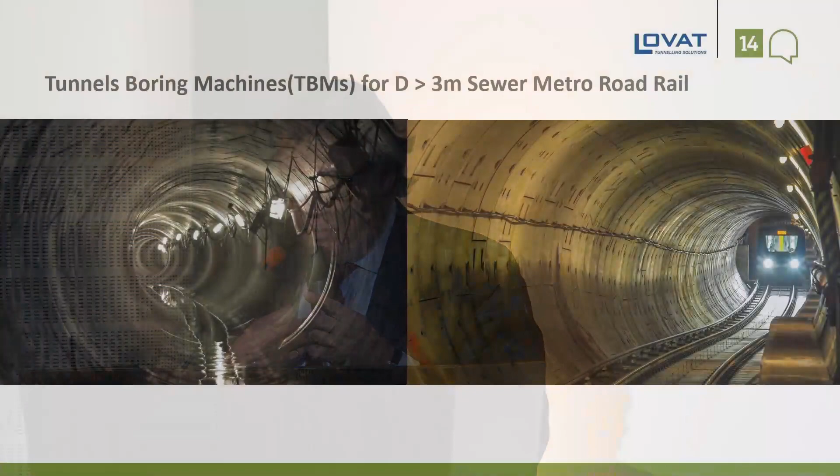So I'm here to talk to you today about my experience in urban tunneling. I am a TBM manufacturer, so I'm usually the last one on the list when it comes to contracts and initiating works. So we have a very practical way of doing things. I'm a mechanical engineer. Are there any other mechanical engineers in here? Please hold up your hand. That's what I thought, none.

So in my world, if it doesn't move, I'm in trouble. In your world, if it moves, you're in trouble. So we are very much detail-orientated people. We're always looking to innovate and create new solutions to problems. So I may be going a little deep into the weeds of technology, but that's what we mechanical engineers do, and I'm hoping to convey some vision at the same time.

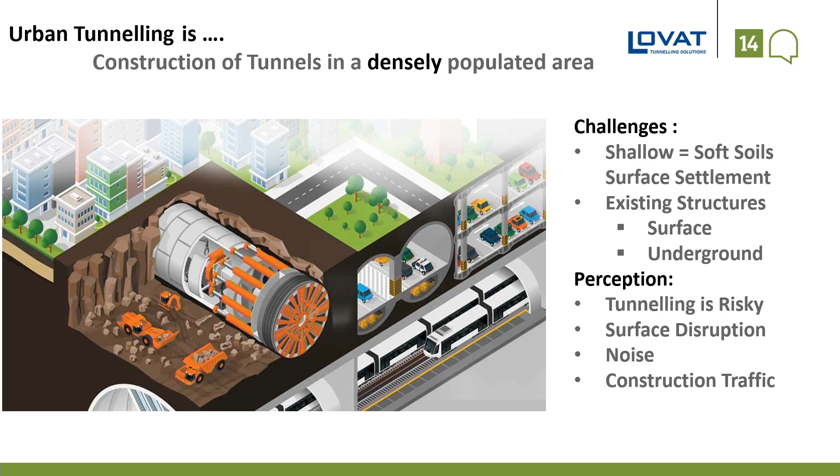So tunnel boring machines, or TBMs, are generally larger than 3 meters in diameter, used for sewer, metro, and rail tunnels. Urban tunneling is construction of tunnels in a densely populated area. The challenges it brings: the tunnels are shallow, which means they're in soils, soft ground. We have to deal with existing structures, either on the surface or underground.

And the perception is tunneling is risky. And the only reason that is a perception is because negative results sell media. We don't provide enough information of our successes around the world, but there's this perception. Perception is also disruption on the surface, noise, and traffic congestion, which is really not the case.

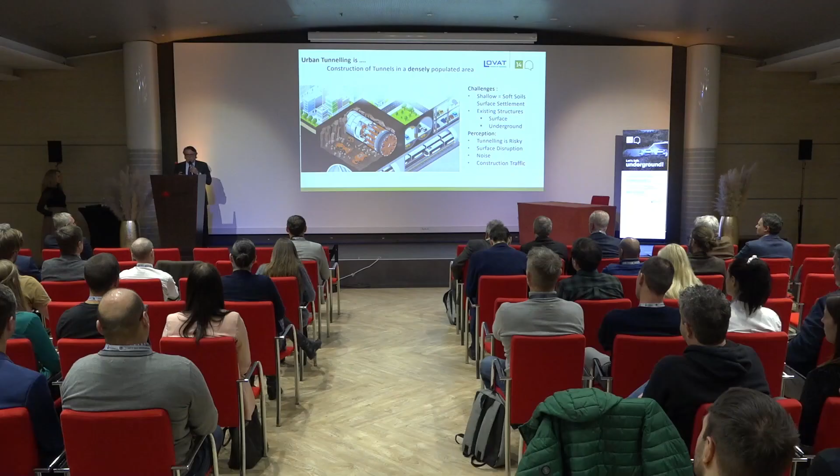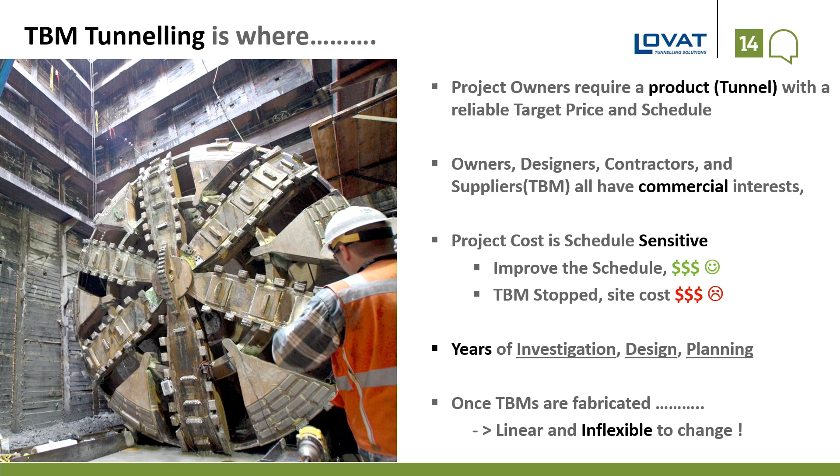Tunneling is where project owners require a product, a tunnel, with a reliable price and schedule. Owners, designers, contractors, and suppliers of TBMs all have commercial interests. We're in business to make money. End of the story. Project cost is extremely sensitive to schedule. There is a high capital investment to get the project up and running, but when there are delays in the project, the costs actually skyrocket, become disproportionate. So, if we improve the schedule, we save money.

A stopped TBM is extremely expensive, and usually we mechanical engineers feel the heat first when we have a machine that is stopped. Tunneling is years of investigation, design, and planning. Years. It's just not something that happens when you buy a TBM and put it on the ground. There's a plan. Once a TBM is fabricated, brought to site, it's relatively inflexible. So therefore, you go back to the first point: planning, planning, planning, and planning. And I will say this many times during this presentation.

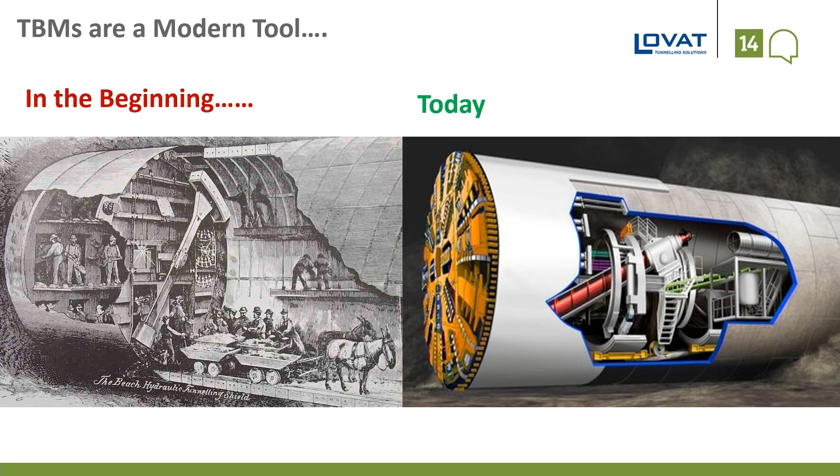In the beginning, 100 years ago, this is a project in Canada. You see the means of excavation, manual, haulage of material by a donkey, a segment erector. Today, we have a very complex mode of excavation, cutting heads, excavation material out by a conveyor, and the same in concept segment erector. In 100 years, we moved forward quite quickly on the innovation side, and predominantly this was done in the 70s, 80s, and 90s.

Since the 2000s, and it goes back to what Arnold is saying on these contractual arrangements, we have become quite stagnant in terms of our innovation on tunneling machines. One thing we have done is we've moved the size of machines further, larger and larger.

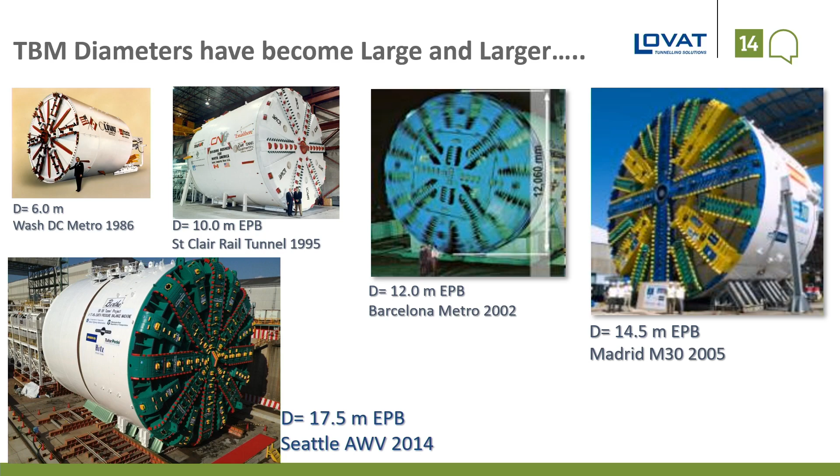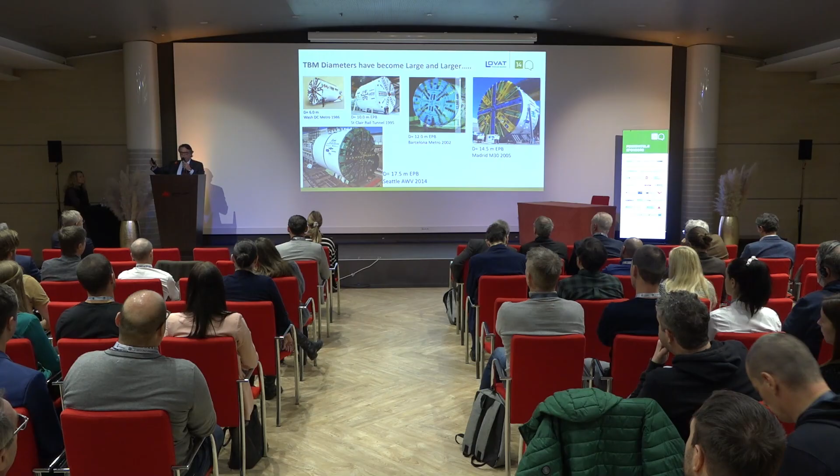When I graduated university, this was a big machine, a 6-meter machine. And then, oh my God, who's dreaming of a 10-meter machine? Who's crazy enough to dream of a 10-meter machine? Mechanical guys. So we ended up building 10-meter machines, then 12, 14, and now the standard is up to 17, 18-meter diameter machines. Today, the 10 to 13, 14-meter machines are the norm. You can have a high level of confidence in these size machines.

The development of this technology has been by quite a large group of people. We in North America are developing our own. The Japanese were leaders in the 70s and 80s of the technology, and many of the things we use today originated in Japan. The Europeans, specifically Germany, also ran their own program on developing machines, as well as the British. Today, the center of activity is coming from the Chinese. They are the ones developing, innovating, and mass-producing these machines.

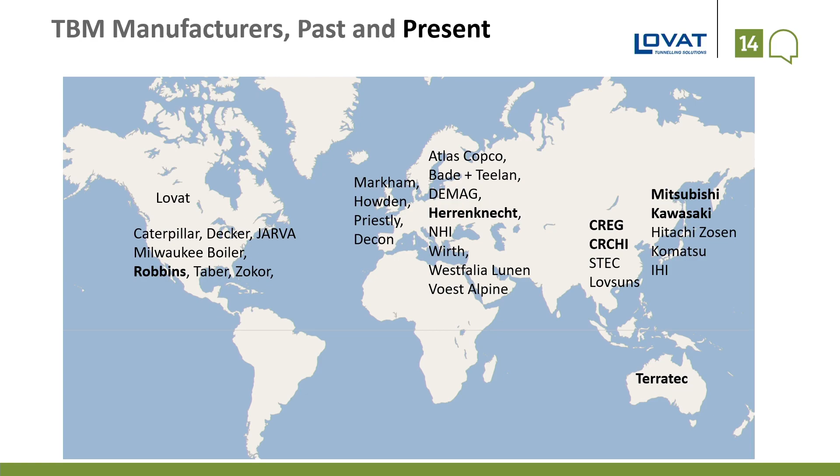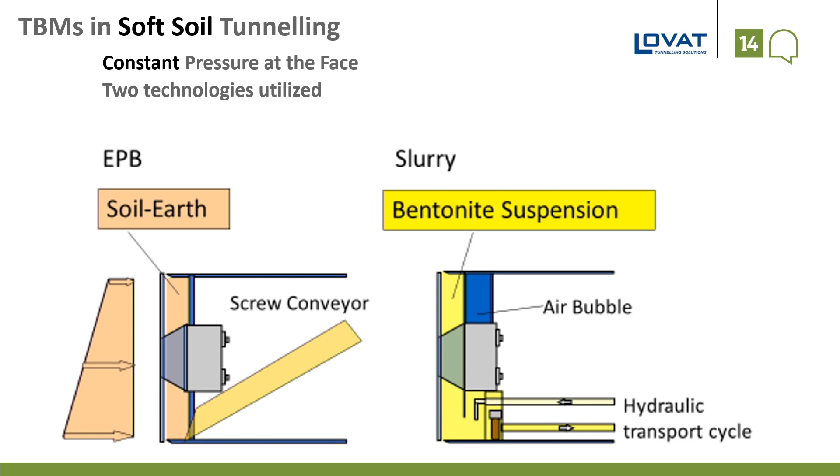So what tools do we have when we go into soft ground? We have basically two tools to choose from, and they're quite similar but different in the way they achieve the goal. The goal is constant pressure. These are submarines, they really have to think they're a submarine. They're not an excavating tool, but a submarine which has to create pressure in the front and completely around the shield of the machine.

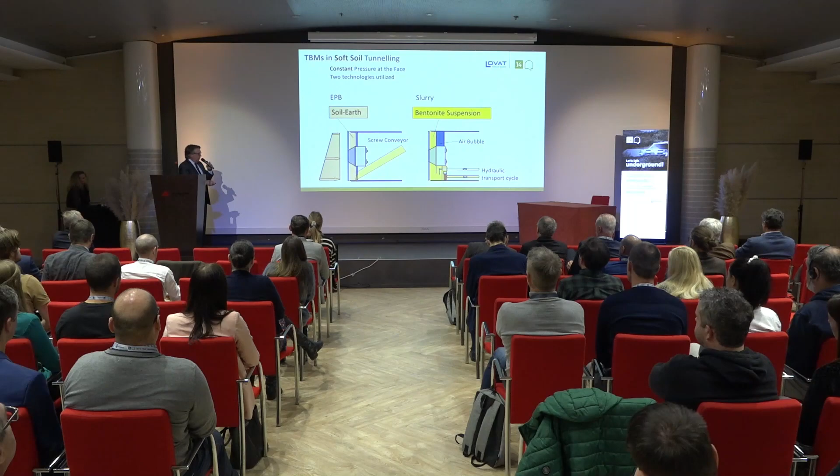And how do we do that? There are two methods. One is what we call an earth pressure balance machine, which uses the soil itself to create the pressure against the face. The other, a slurry machine, uses bentonite to pressurize the face with an air bubble. The mode of transportation of muck is through hydraulic transport. So we have to decide which one we're going to use.

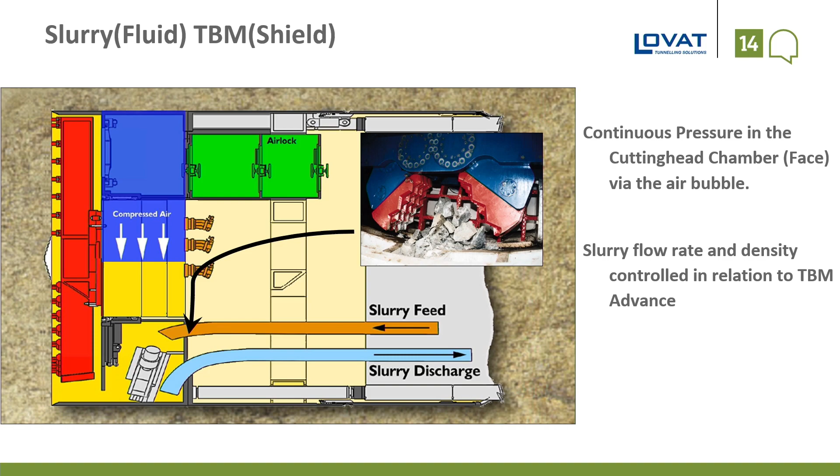A more detailed look at a slurry machine: we use compressed air, which pushes like a shock absorber in the liquid, which pushes against the face. So this type of machine is always under pressure, and it's very suitable for coarse materials such as sands, gravels, etc.

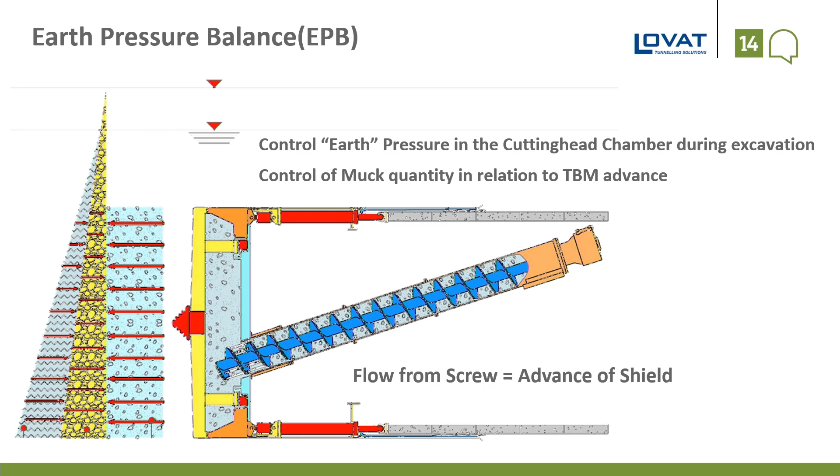Earth pressure balance machines use a screw conveyor to meter, for every revolution, how much muck is displaced, and the machine moves forward. The problem with earth pressure balance machines is that they don't have this shock absorber effect of the air, so we have to introduce it. We have an external tank located on the backup of the machine, which does exactly the same as a slurry machine to provide this air pressure, keeping the entire shield and face under pressure.

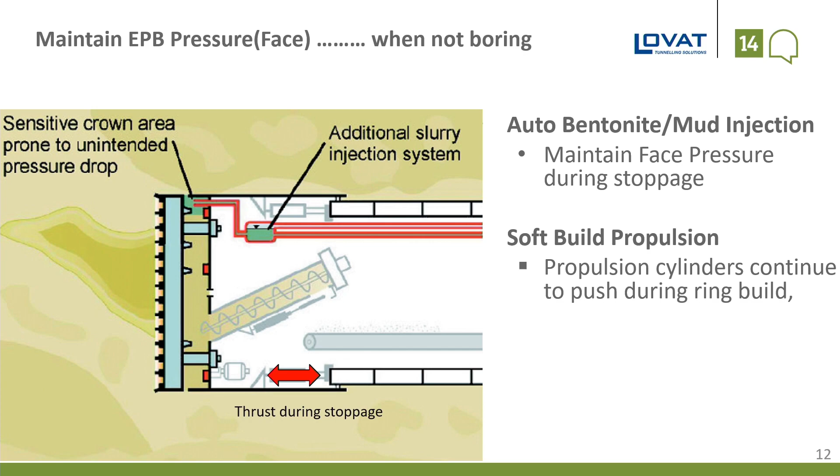Soft ground tunneling is — when I graduated university, a client of mine said, basically, you have to excavate the soil without the soil knowing it's been excavated. You do not want to change anything around the soil as it's being excavated.

Tools that we've developed, again starting out of Japan, include the ability to add additives, chemicals, to the face of the machine to treat the soils so they are more fluid and able to be digested by the machines while maintaining pressure. There are a number of components we use: foam, no different than the foam we use for shaving in the morning, made of soap, water and air; polymers, the same type used in babies' diapers to absorb water; and bentonite.

So these are three things we inject in the front of the machine. There's an art to all this, where we combine the three and utilize them for different purposes in different geologies. This is an art, and expertise that comes from the site. It cannot be fully planned in advance, but we need the tools on board the machine in order to achieve the right combinations.

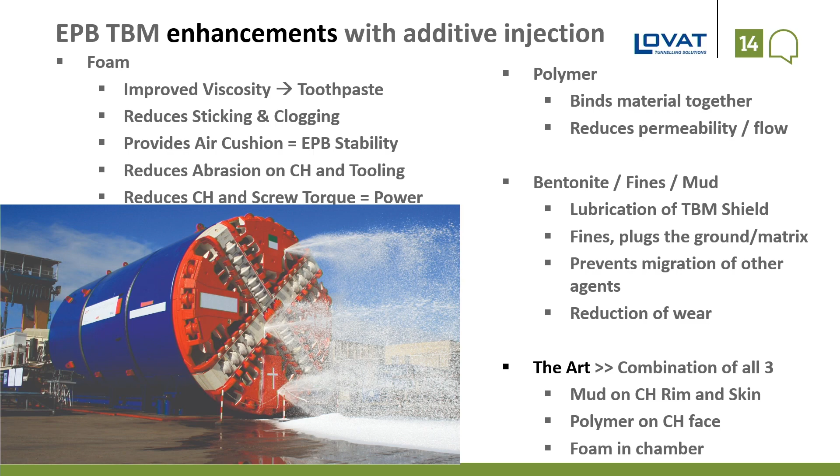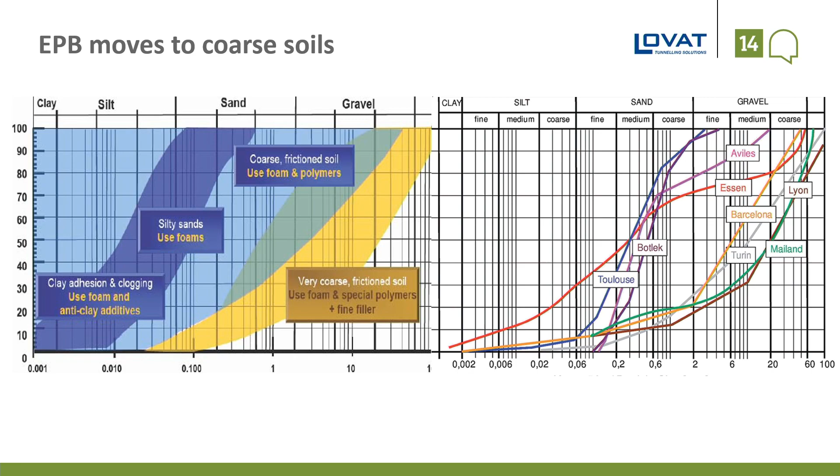This also means that when we're using additives, the machines are inflexible once they arrive on site. We must do our homework on how we're going to use these additives in the machines. Tunnel boring machines are not laboratories. They're not to be put on site and then start testing different materials and how they react with the geology — far too late, far too late. Any failures or miscalculations on the additives have consequences on the machine, such as clogging, and then you can spend two weeks unclogging the cutting head.

So laboratory testing is essential — these are two famous universities here in Europe, Politecnico di Torino and Bochum University in Germany, and they have simulation equipment, including this screw conveyor. They put material under pressure with additives and test which additives work with the geology shipped from the site. This is what we really look for: this type of consistency, like a toothpaste. And this type of work must be done in advance.

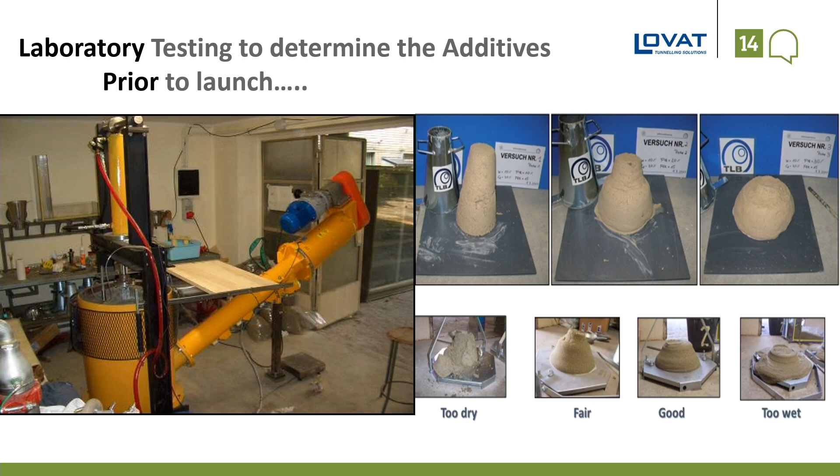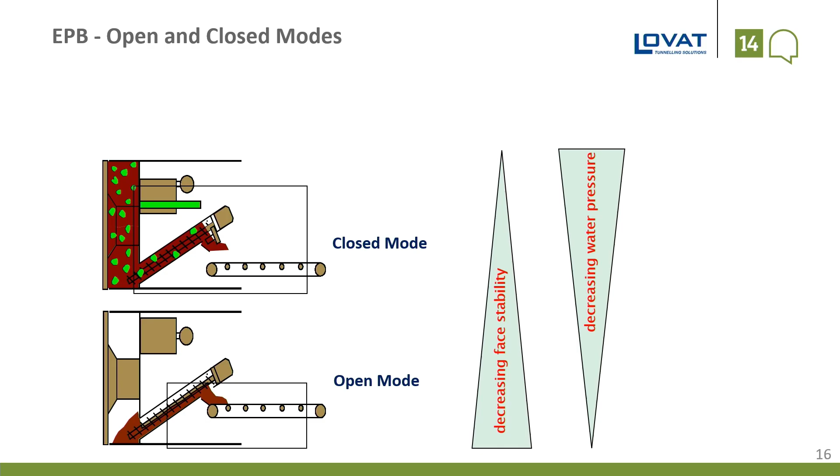Earth pressure balance machines have one extra bonus going for them. Traditionally, they work in pressure mode, where the screw conveyor keeps the cutting head chamber and the face under pressure. However, if we hit very good conditions where the ground is standing up, a soft rock for example, we can profit and only use the screw conveyor as a transporter device to take material from the cutting head to the conveyor belt. This increases the rate of penetration, improves the schedule, and reduces wear on the cutting head. If we run into this type of geology, we have the ability to profit from it.

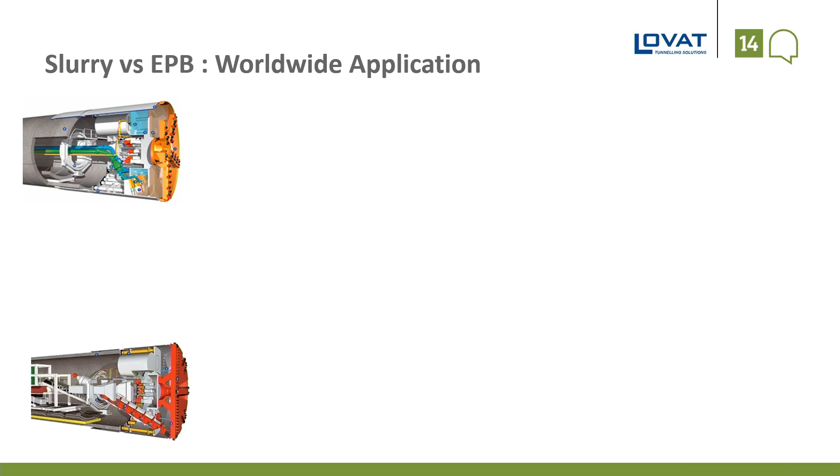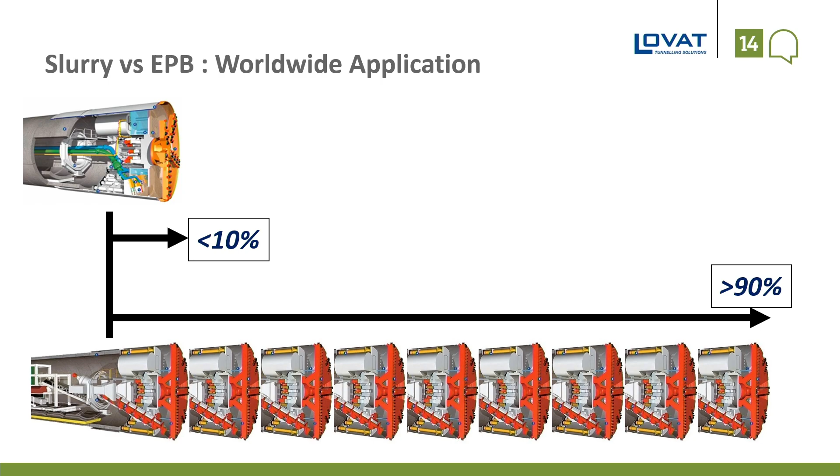What are the worldwide applications between slurry machines and earth pressure balance machines? Today, 90% of the tunnels in the world are being bored with earth pressure balance machines. There's no doubt slurry machines have their purpose—it's a narrow band of coarse material, high water pressure—but earth pressure balance machines are much more like a Swiss Army knife. They have all kinds of tools that pop out, far more flexible. We can adapt its application as we have changes in geology.

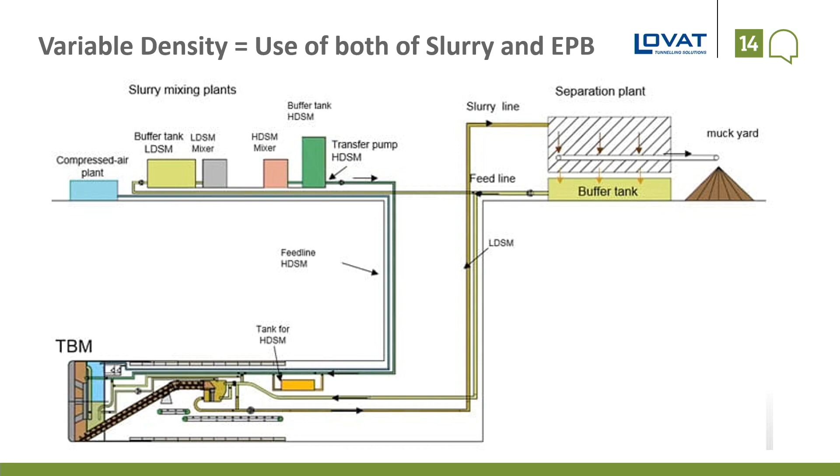Herrenknecht has come up with a solution between the two, known as a variable density machine, developed in Kuala Lumpur. It's been used in Berlin, where it uses both a screw conveyor and a bentonite slurry system. Both systems are used on the same machine, which requires a conversion. This will have applications in difficult geologies with wide spectrum changes from clays to gravels.

The point I made earlier on—pressure, pressure, and pressure—cannot be repeated enough. The contractor, the owner, the geotechnical people, even the mechanical guys, we tend to focus on the face of the machine. However, this machine is 15 to 17 meters long, representing a day's production from the cutting head to when the segments are permanently placed—one day. In that day, over the shield itself there's a gap, because the machine has to move. Then there's another gap in the back where the segments are installed. It's absolutely critical to keep this zone under pressure.

We have seen, when we watch settlement curves, that the settlement is actually in the back of the machine, not in the front. We control it in the front, but then we lose it in the back. So there's far more focus now on the shield and the tail of the machine to virtually have zero settlement.

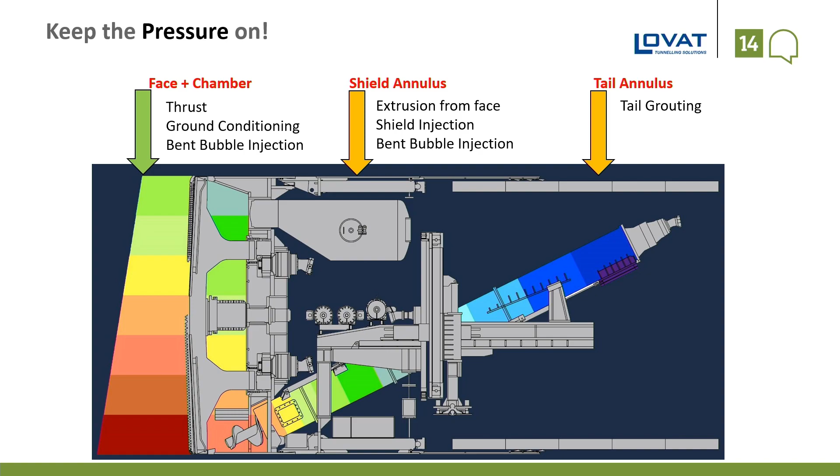The main point I'd make, if I were a TBM manufacturer going into a project, is know your geotech. The ground is the boss. You cannot win the fight if you try to impose your methods onto the ground. You must understand the geology—how does it behave, how does it interact with the machine? I'm not a geotechnical engineer, but I know what I need to understand to get the best performance of the machine. The more information we have, the better it is.

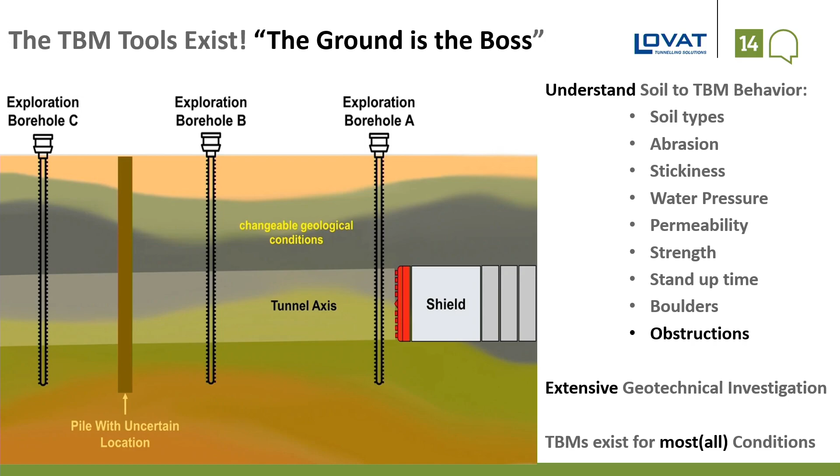And the biggest surprise is obstructions. Obstructions are the killer of TBMs. We've seen a number of times where tiebacks, sewers, any type of man-made object in front of the machine—that's bad news. It's a problem in the industry because cities built in the 50s, 60s, and 70s often lacked good documentation of what infrastructure was put into place. But it's critical to find out if there are any potential obstructions that may occur in front of a machine.

I'll say this—I know there's a lawyer in the room, so I'm being careful—I'll say TBMs exist for all conditions. Since I'm not a lawyer, I'll say most, because I don't want to get myself into trouble. But I'm a believer that basically any geotechnical formation can be solved with a tunnel boring machine.

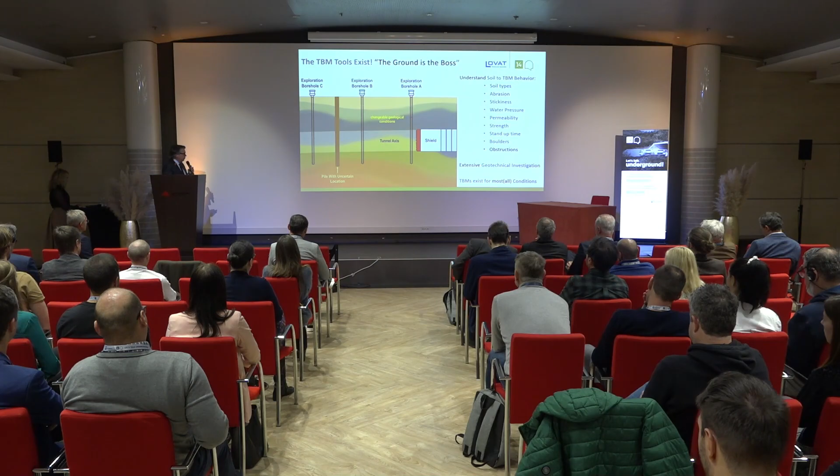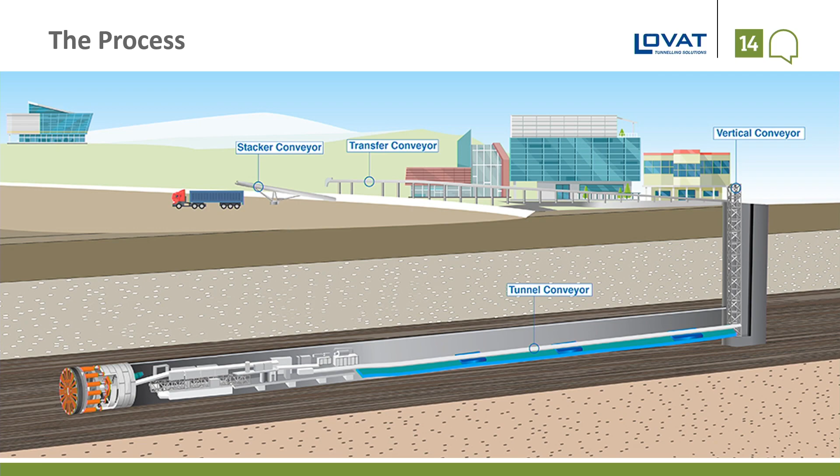So we focus on this piece here. This is only part of the discussion when you're tunneling in an urban environment. You have this process where you take the material out, load it on a truck, and take it away to do something with it. In the opposite direction, you have to bring the segments down into the machine.

There are so many interlocks inside today's tunnel boring machines, it's a factory. So the factory approach must be taken. Prior to starting up a factory of anything, there's all kinds of testing that goes on, and we must be treating tunnel boring machines exactly the same way. Test, test, and test.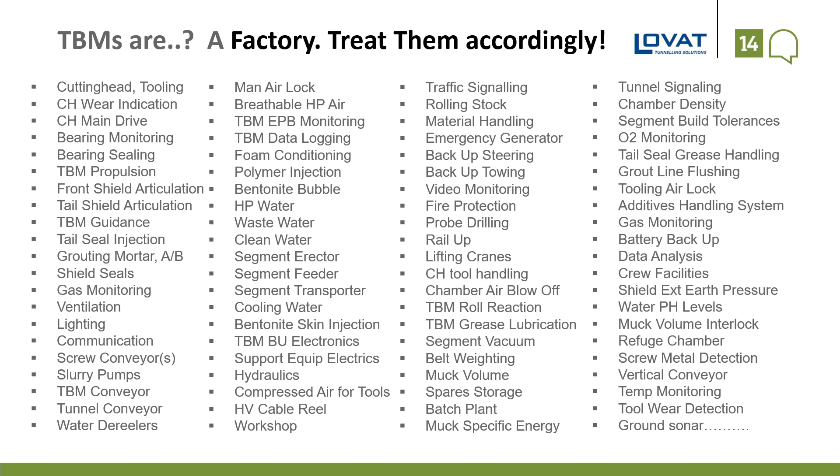Developments we've been doing recently - we historically have been using rail transport to bring materials in and out of the tunnel, muck boxes to bring the muck out, segments go in with rail. The production, unfortunately, was tied to the quality of rail in the tunnels. Because it's a temporary build for tunneling only, many contractors wouldn't focus on the quality of rail. It would lead to derailments. Derailments mean stopped production. So again, this is part of the process.

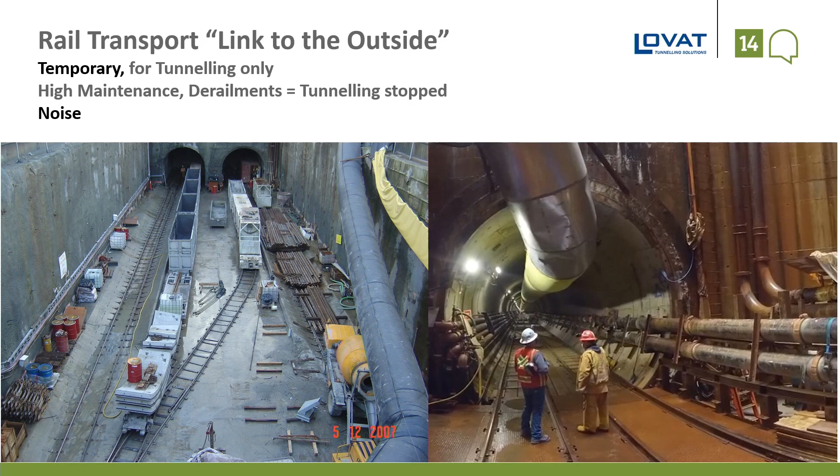What we've been able to do in the last few years is use manufacturers who've developed rubber-tired transport, meaning everything is going in and out on trucks, on rubber tires. But the real reason this has been achieved is that we now use continuous conveyors to transport the muck, instead of muck boxes, because the muck and the segments are going in opposite directions. So now these two activities are separated, which gives us another boost in productivity and removes the noise.

The loudest thing you'd hear in this tunnel - at the time the largest tunnel in the world, in Seattle, Washington - was the truck honking a horn. Otherwise it's just a small hum from the continuous conveyor. So the noise, which is a health and safety issue for tunnelers, has been reduced.

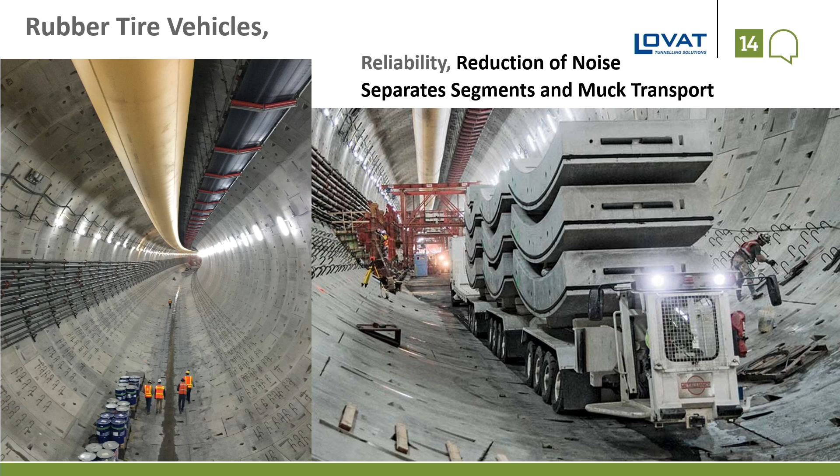So I go back to the same project, Alaskan Way Viaduct. This is the tunnel, 17.5 meters in diameter, a two-lane highway, which was to replace this viaduct right up against the waterfront of Seattle. This is an example of instrumentation and what it can do for us. The tunnel alignment ran parallel to the viaduct and eventually had to cross underneath the downtown through various buildings. The deal was the viaduct, which we were replacing, must stay live while the tunneling operation was going on. It was only closed for 3 days while the TBM actually crossed underneath it.

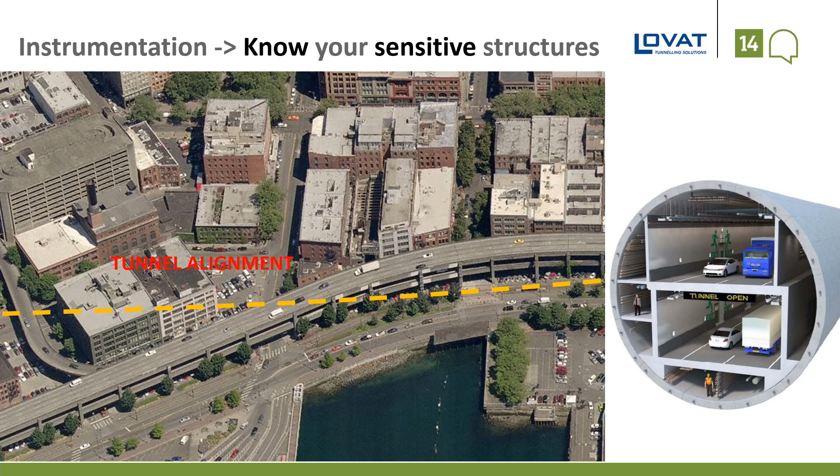So there was always obviously concern about settlement on the viaduct. The viaduct was standing on pillars with micropiles underneath, and here's our tunnel that goes underneath it. Here's the supports. So it was decided to come with an elaborate scheme of jet grouting to isolate the tunnel from the viaduct.

When we approached the viaduct, the instrumentation spent on this project was astronomical, probably over the top - extensometers in front of the machine, and we knew what the pressures were, the densities of the material. On site it was like a command center, like being at NASA. All these screens - we could watch exactly what the machine was doing and have instantaneous feedback from the extensometers on how the ground was behaving 1 meter above the tunnel.

We knew exactly how the ground was moving, and we approached the viaduct with basically zero settlement. We went underneath the viaduct with zero settlement, and we went under these other buildings with zero settlement. And that was all due to an investment in instrumentation.

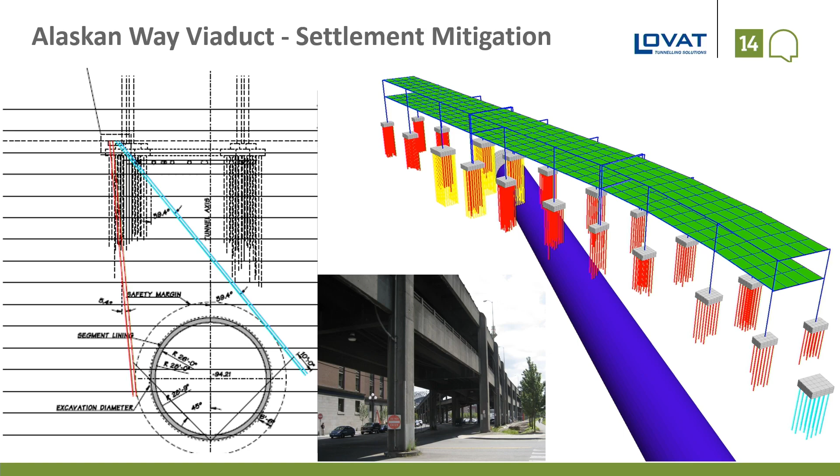So these machines can do wonderful things, but you need to be able to monitor and measure things. Once we passed under the viaduct and spent all the money on instrumentation and jet grouting, we tore it down. So when we look back at it, we say perhaps we didn't have to spend that money, but hindsight's always 20/20.

And this is the point I'm making with respect to information. The amount of information that comes off these machines is of value and needs to be read and interpreted by the right people. This information is not just for when something goes wrong and you try to find the root cause. It's to be proactive and help solve problems before they happen.

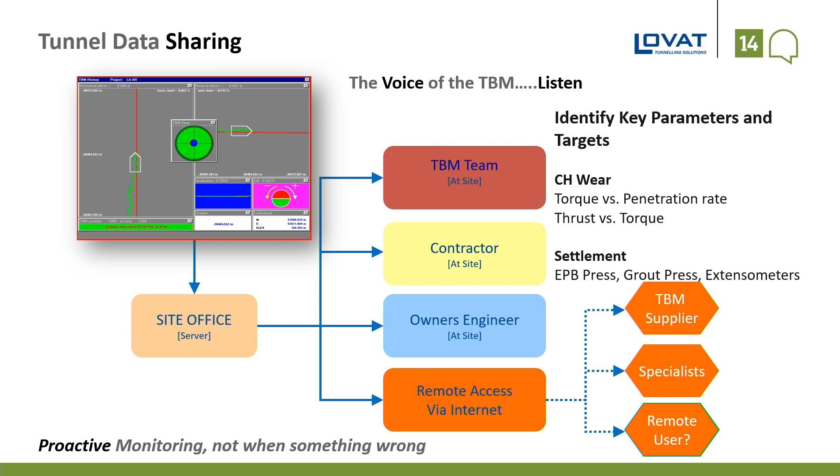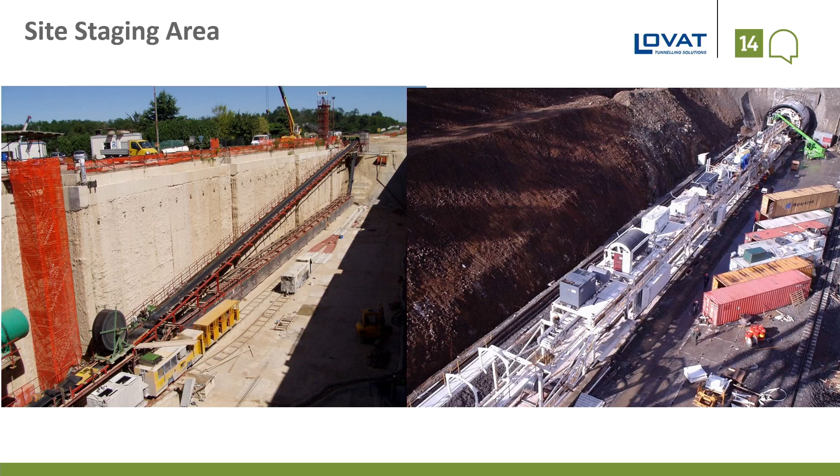So we moved to site, the back end of the machine. This is an 11-meter machine with its entire backup, 150 meters long. These are not small factories, they're quite long. In the station or portal, there's always a continuous conveyor to pull the muck out. So we need space when we assemble these machines. We need space.

We need space. So if we're planning a tunnel in Ljubljana, which I think we are, we have to consider all of this. Where do we put this infrastructure to support the monster?

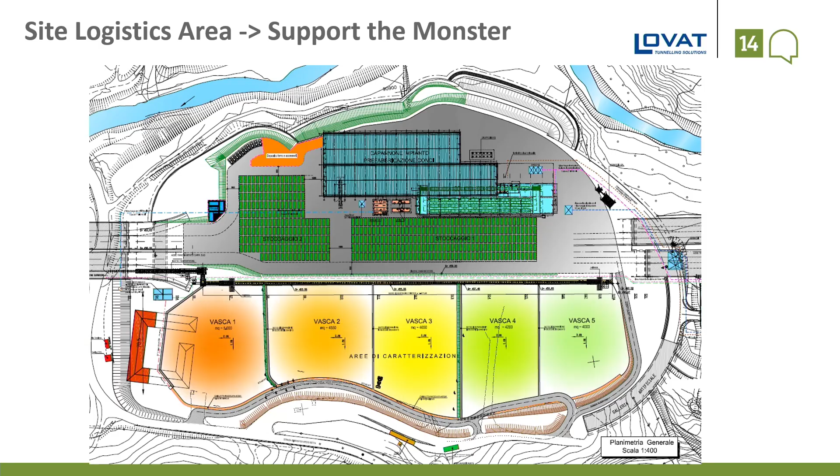There's always a perception in the industry that the critical path goes through the TBM, and we must order this TBM as soon as possible. No, it never goes through the TBM. It goes through the segment production. You have to design a ring, order the forms, set up a factory, start production of the segments, and store them and let them cure. The critical path goes through there, never through the TBM.

TBM manufacturers can react quite quickly, and the haste that goes into ordering TBMs comes back to haunt us at times. Take your time, have the right geotechnical information, and design it properly.

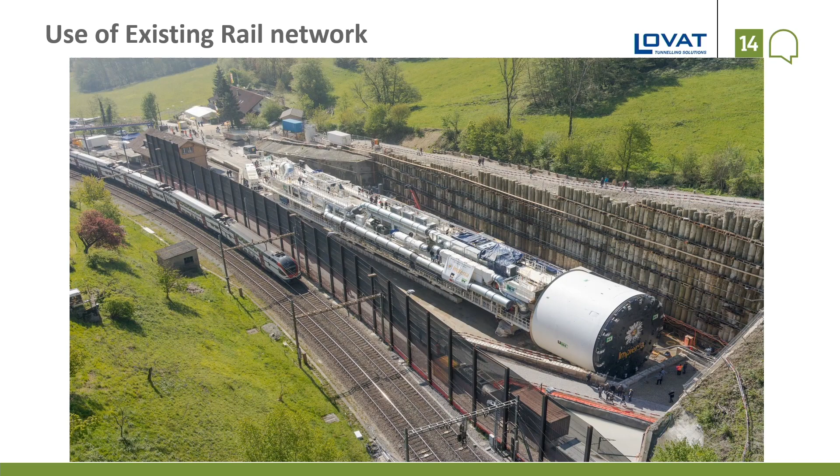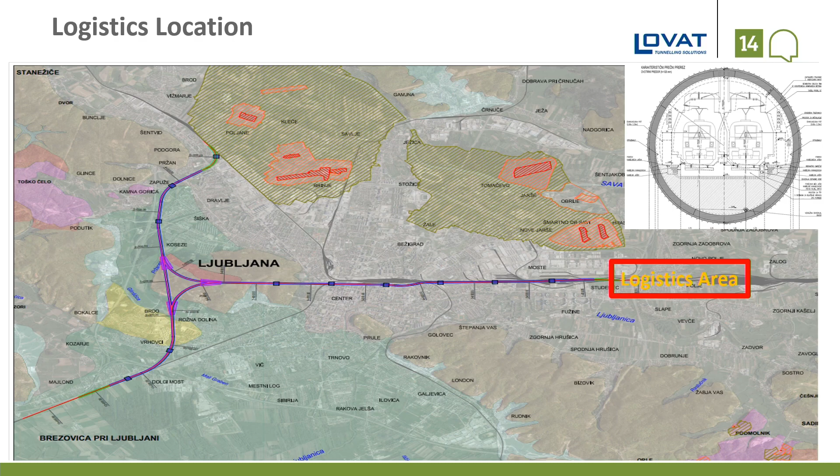So if I was planning a tunnel in Ljubljana for railway purposes, perhaps a tunnel with 2 trains in 1 tunnel—here's the downtown, the center. There's a wonderful area just to the east, which makes a perfect logistics site with respect to the rail network. Pulling everything in by rail, keep it off the streets, feed it at night for your daily production. This would be a very nice solution, keeping away from downtown, keeping the trucks out of downtown, and you can achieve 2 long bores from 1 logistics area.

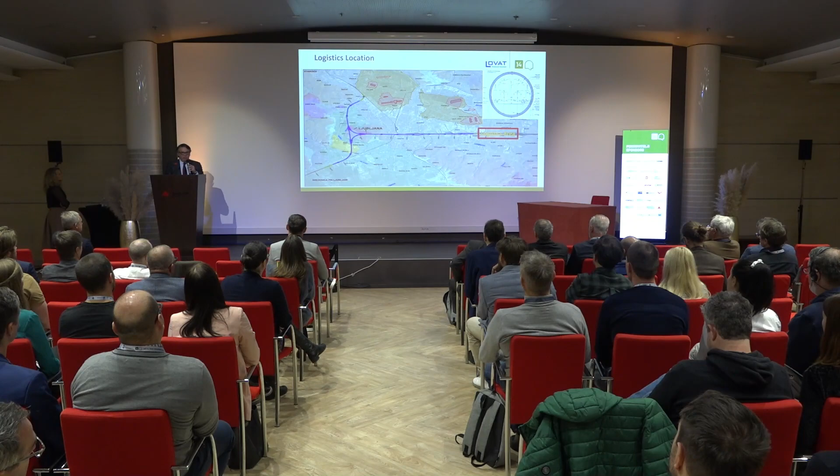So everything I said in the last 20 minutes: tunnels are the sustainable solution for the development and improvement of cities. There's no doubt about it. They connect from A to B.

Has anyone ever heard anyone complain about tunnels? No, once they're built and operational, everyone's extremely happy with them. Tunnels have been in existence. If you look at Paris and London, when they put their metros underground, everybody's ecstatic about their metros and proud of them. So there's never any argument once it's done.

Know your geotechnical conditions, and this is for everyone. Too many boreholes never hurt anyone. Too few can be painful.

Investigation, design, and planning—it's a process, it's a factory. You stand back and cooperatively everyone designs this process. The construction is just an implementation of the plan. It just happens. You have to stick to the plan that you've designed.

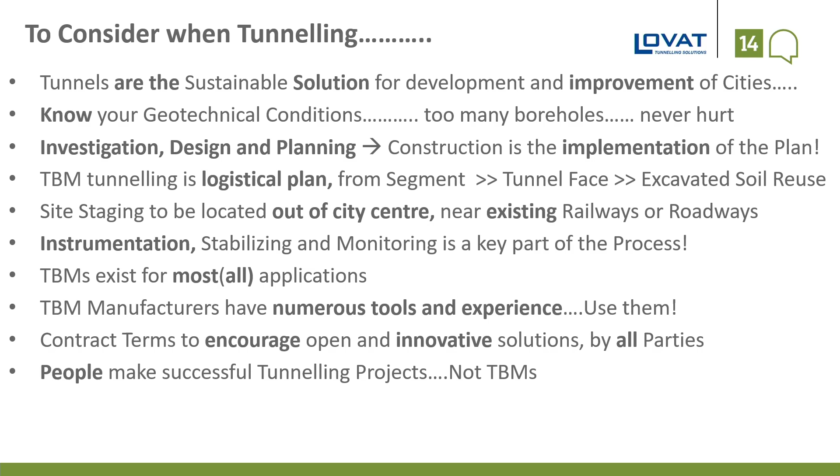Site staging, TBM tunnel logistical plan—from the segment production, as I was saying before, to the tunnel face, to the muck disposal. What do you do with the muck disposal? Once the muck is dried, coming out of an EPB machine, it can be reused for fill. So this is something to be considered: the reuse of the soil.

Site staging, out of the city center. Keep the trucks out. This is a planning issue, not a construction issue, it's planning. Keep it outside the city center.

Instrumentation, stabilizing and monitoring is the key part of the process to have zero settlement. And again, TBMs exist for all conditions.

I cannot see how the industry cannot react to any difficult geological formations. TBM manufacturers have hundreds of machines in the field. They've done thousands of projects. They have many tools and vast experience, which goes underutilized during bidding and design stages.

Use this as a tool. It's an experience that, I'll say it, contractors and designers don't have as deep. TBMs have been in trouble, there's no doubt, but we've always gotten out of trouble. So use that experience.

Contract terms to encourage open and innovative solutions. We have become stagnant in the last 20 years, but we need a means of contracting. We've heard it somewhat from Arnold, that's open, everything is on the table. The machines I have seen that developed the fastest and newest ideas were where it was an open commercial arrangement, sharing the risk. And at the end of the day, it's people who make tunnels, not TBMs. So you need to invest in the people with experience.